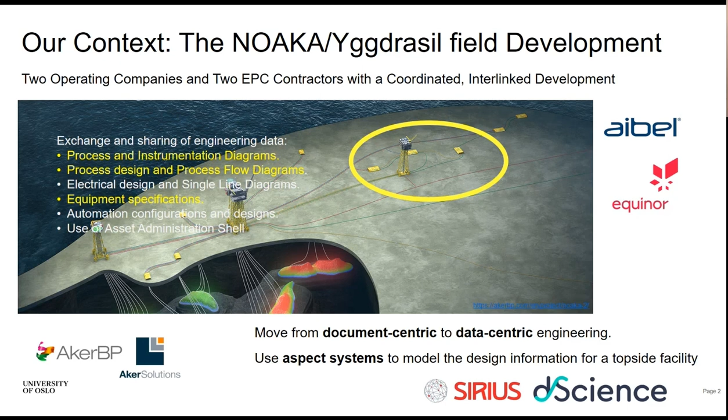And there's a concept called aspect systems, which actually came into the chemical engineering community through Wolfgang Marquardt and the people in Aachen with OntoCAPE, the ontology for process engineering, back in 2010. So, a little bit of what DEXPI is.

DEXPI is at the moment a voluntary and somewhat financed effort to create neutral standards for engineering. And it's quite a large number of people. It's a community who are willing at the moment. They're currently working on becoming a German non-profit organisation to get a bit more commitment.

And so, the DEXPI Plus working group was given a mandate that you can go out and have a look at a DEXPI standard, and that standard defines a way of trying to represent information on piping and instrumentation diagrams. Now, we can do piping and instrumentation diagrams, and we're currently, with the Norwegian industry, stress testing that standard by trying to send piping and instrumentation diagrams around that field development I showed you.

The next question was, what about the other diagrams? The process flow diagrams and the safety diagrams and the block flow diagrams, which are documenting early phase design. What is the linkage of those to P&IDs? And can we create some sort of vendor neutral model for these sort of drawings?

Now, state-of-the-art practice for a process flow diagram is you get a drawing tool and you draw objects. There isn't usually a connection to any smartness behind these objects. And we believe that there should be some sort of object behind that.

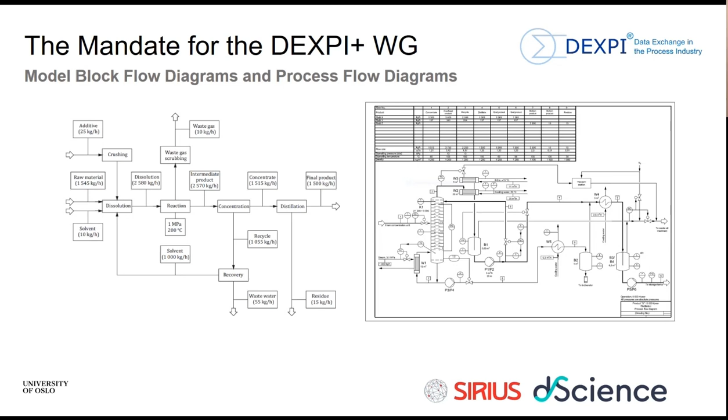So what you see, these are the typical examples of the sort of things you have on process flow diagrams. Now, there is a gap in the standards on how we describe things. Because what does a symbol on a BFD or process flow diagram actually represent? And if you go into the various standards, there's lots and lots of different answers. And most of them are saying, well, that's actually a distillation column. Or, well, no, it isn't. It's actually a system that's performing a process.

So what you've done is you've used a symbol that says distillation column and said that I'm actually trying to model here a distillation process, which I'll eventually go and buy some sort of equipment to realise. And so you want to be able to have process requirements, process constraints, and build up a model of functional systems. In early phase design, you're not so much concerned about what you're building, you're concerned about what you're trying to do in the plant.

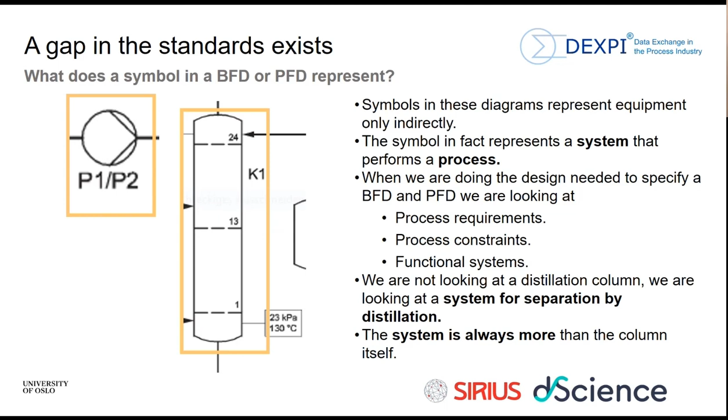And so we're not looking at a distillation column, we're looking at a system for distillation. Or here we're not looking at a pump, which is actually two pumps in parallel. We're looking at a system that you need to pump this fluid. Okay, probably a bit laborious over on that.

And it's rather interesting that standards have been able to test this stuff, because Arthur D. Little, 100 years ago, invented the concept of unit operation, which in some ways completely revolutionised the discipline of chemical engineering. Turned it from being industrial chemistry, where people built bits of equipment, into the discipline we know today of chemical engineering.

And so what we have here is that in DEXPI, piping and instrumentation diagrams, you're dealing with things, plant items, typed by noun: a valve, a pipe, a pump, a heat exchanger. It's a physical object, it's a thing, and you're asking there about how large, how heavy, constructed of what, and which product are you putting into.

Up in process design, we're looking at something which is a process step, and you type that by verb. Compressing, pumping, distilling, separating, regulating flow. So when you see a valve in a PFD, you're thinking, I need something to regulate flow. You're not thinking, I have a valve here. And there you're asking questions about how far, how much, how fast, how efficient, how near to completion, and how pure. Process requirements.

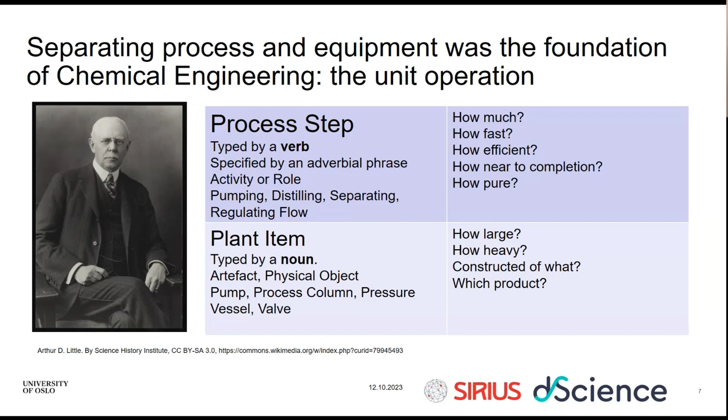And so we have at the moment, and this is taken from systems engineering, this V diagram, where you have functional requirements, how fast, how much, how well the process is going to behave. And then you have equipment requirements, which are about: will this piece of equipment actually tolerate the pressure I have? What material am I made of? Will it corrode? And what you'll see in operation is the equipment functional requirements will result in maintenance things about how well the bit of equipment is behaving.

But then when you want to do process optimization, you'll back up again, trying to get access to process functional requirements. Now, the trouble at the moment is all the standards we have talk about things. And what you see in engineering information systems is all that information you need to do process simulation is rolled down onto a long list of parameters related to a thing. So you've lost all the connection up to the process functional requirements. So DEXPI Plus tries to bring this standards landscape in that direction so that we can actually document process design in a good way.

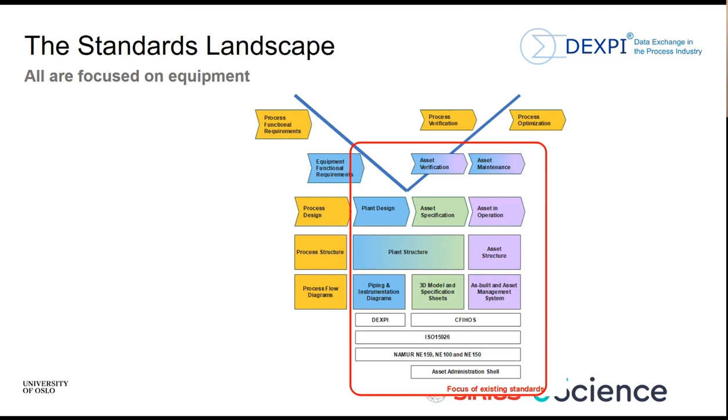If you like three-dimensional diagrams, which I don't, this could be an interesting way to look at it. You're saying, okay, we're looking at some system and we look at it in three ways. First, we think about what it's going to do. That's conceptual design. Then you say, okay, to achieve this functional design, we actually have to build something. And that's the structure, the piping and instrumentation diagram, your specification sheets, and you've got DEXPI and CFIHOS covering that area.

And then the thing tying it all together is the behaviour. And that's where CAPE-OPEN comes in, because it's about simulation and thermodynamic properties. And those things you want to show on a PFD through your stream tables.

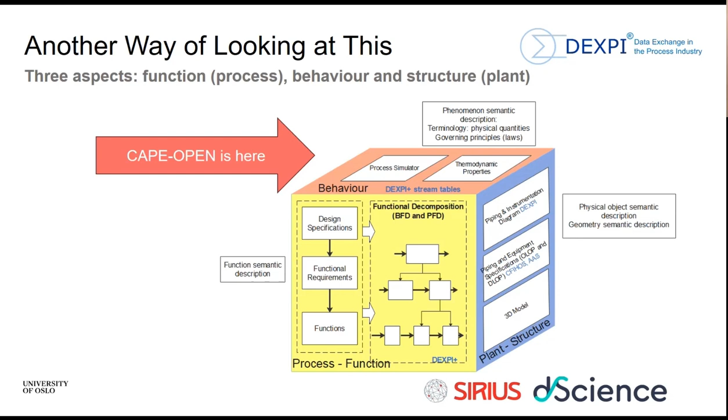So today's design approach is that you get a pile of digital paper sent over from the company, the recommended practices, the standards, the API standards you're going to use. You then structure a manual configuration of a model for a PFD, which you put into your simulation platform. And then you generate out a set of specifications. You then manually, or using macros on Excel, put that into the constraints that you put on your simulation. And then you run lots and lots of cases.

Those cases give you a set of results, which then give you simulation cases, which you put into another Excel spreadsheet and then put onto the stream tables in your PFD and send it to the operator. And that eventually gives you the design, which is an even bigger pile of paper.

What we want to do with our digital engineering is to be able to pass around objects that contain engineering information. We want to be able to get rid of Excel, and we want to create standard ways of talking about cases, results, specifications, and constraints, so that this work process will be made less Excel-based and substantially more efficient.

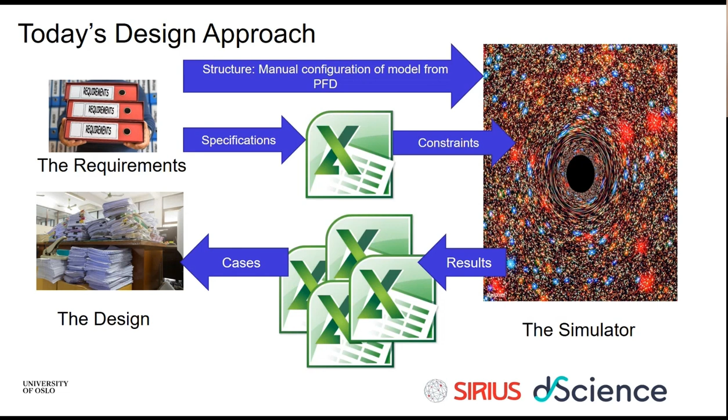So, I've taken a use case from the CAPE-OPEN monitoring interface specification, which is about archival of multiple runs of a flowsheet. Because that's exactly the exercise we want to do in design, where we start building our main process systems, building down through the system until we get to a point where we need to be able to actually specify equipment, we create our P&ID.

And what we want to do here is to be able to take that design, that PFD design, and run many, many cases and get the right cases and create the design window you need to actually then specify your equipment. So to be able to use that simulation in a sensible way and get that information automatically, and not using private Excel-based interface simulators, would be a nice thing.

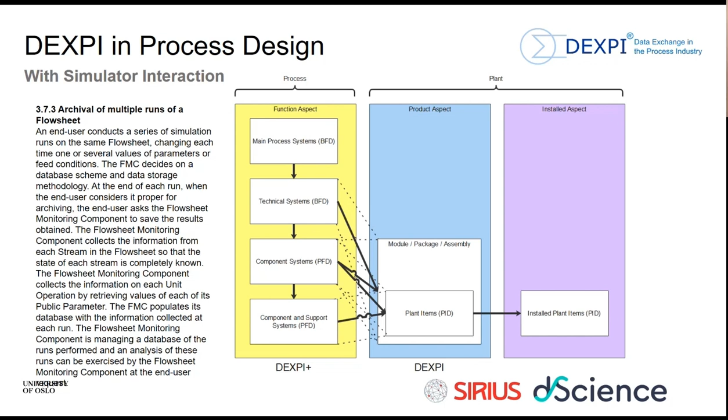So we've designed DEXPI Plus as a library of process steps. Now, the lovely thing about chemical engineering also is there aren't that many process steps in chemical engineering. We'll show you a little bit more. And again, it's not rocket science. We use an approach where you have a block with ports, where you have the ability to put details in. So things like I'm going to do separation in packing or on trays. And then you have sources and sinks. And then you can connect these ports either by energy flows of different types, information flows, or streams.

Looks a lot like the CAPE-OPEN one. It's not accidental, because we basically stole it from CAPE-OPEN. And that stream contains a material state, which is information you have in the stream table. And you have different types of streams because you define a project-specific material template, which says, for my hydrocarbons, I'm going to have this set of components and use these methods. So that gives you the structure for the material state.

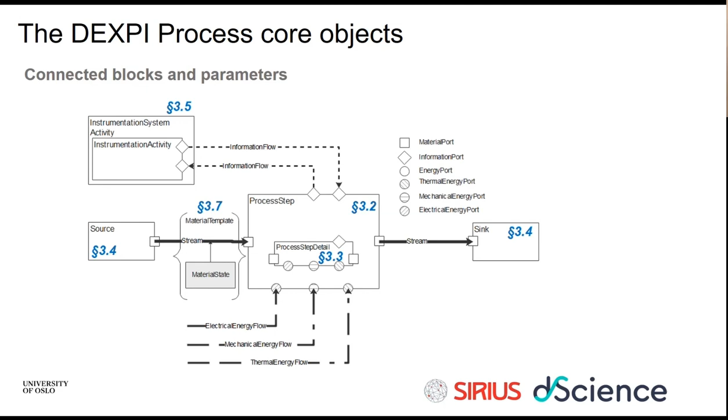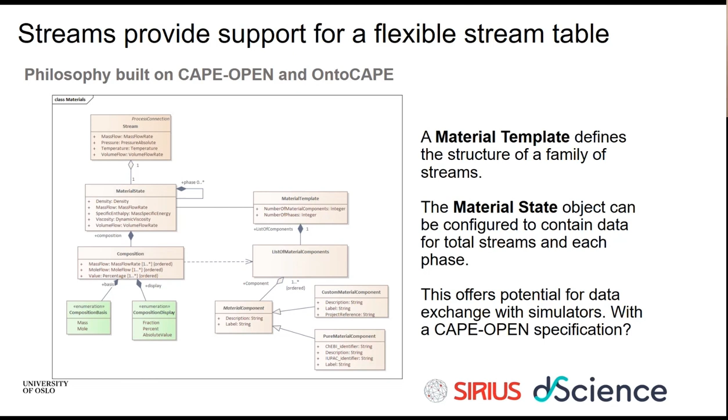So here's the idea of the material template. The material state object is the thing we want to get data out of simulators and put it into to produce stream tables. And I think this offers potential for data exchange with simulators. So what we've developed in the standard is a hierarchy of process steps. Now, obviously, people will come to us and say, yes, but you need another 5 or 10 process steps to make our life as biochemical engineers better.

But what we have is generating flow, mixing, splitting, storing, supplying, exchanging thermal energy, separating of all sorts of different processes. And we also have a hierarchy of process steps. So early in design, you say, I need to separate, I need to heat, I need to do something. And at this stage, I don't care how I'm doing it. As the design proceeds, you're then getting down to the level of unit operations and component systems, where you're also saying, yeah, and I'm going to compress using centrifugal motion. And then that has process implications for the rest of the flowsheet. So you actually have to track that decision on how at this stage of the process design.

So then we have a library of separation by distillation, transporting and piping, compressing by centrifugal motion, as an example. So what we have here is the ability to build up a structured model of a process you have. And also you can associate variables with those specific processes. And what we're doing here is creating a structure that you can refer to by making specifications.

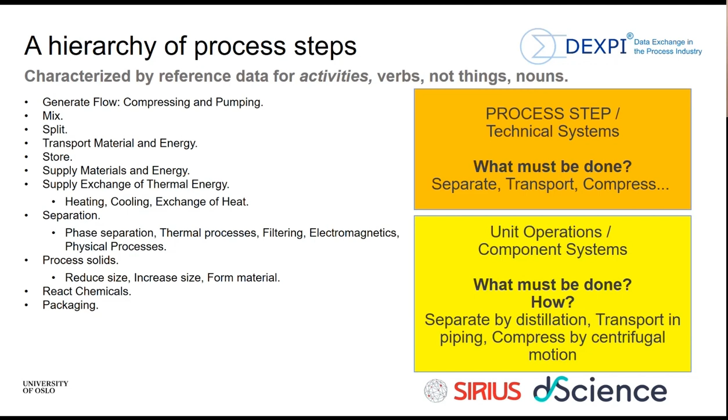And what we often see in standards is that the standard will say a valve is going to have a parameter called maximum allowable working pressure or minimum ambient temperature. Now that's useful, but what you're doing by specifying that in the standard is you're making that model very fragile, because every one of those types of qualified specifications you make is going to actually break the model when you want to make a new type of that specification.

So what we've done in DEXPI Plus is said there's an ambient temperature for a block, there's a temperature for a block, there's a pressure for a block. And then you as a user can create many, many different statements about that pressure, qualified by what mode or range or provenance you have on that variable. And that way we can map across to CFIHOS, because CFIHOS really likes those sorts of lower limit, upper limit, average type parameters. But this makes us more flexible and enables you to create a structure file which doesn't contain any data at all, and then in parallel to that, lots and lots of case files which actually contain the numbers.

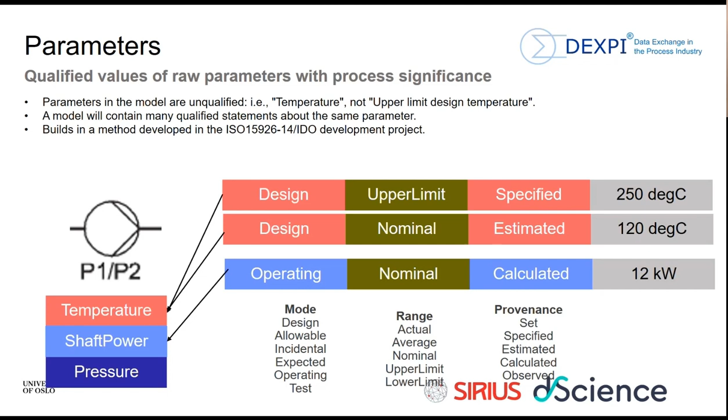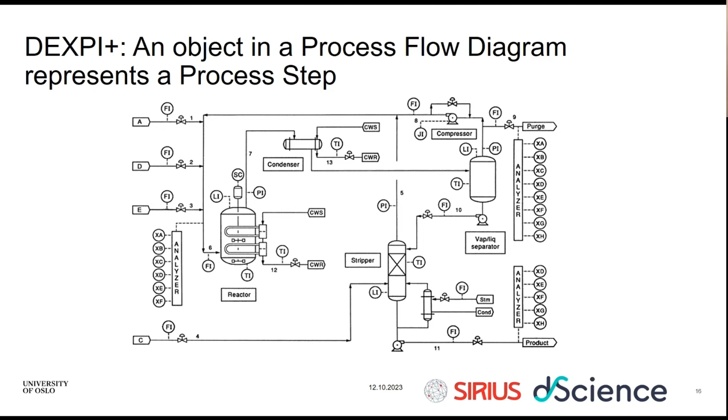So a little bit of example to motivate. Here's a well-known demonstration process called the Tennessee Eastman process. And we were able to model that process flow diagram. It's a fairly effective process flow diagram because the Tennessee Eastman people deliberately didn't actually put in any controllers, because the whole idea was to design control structure.

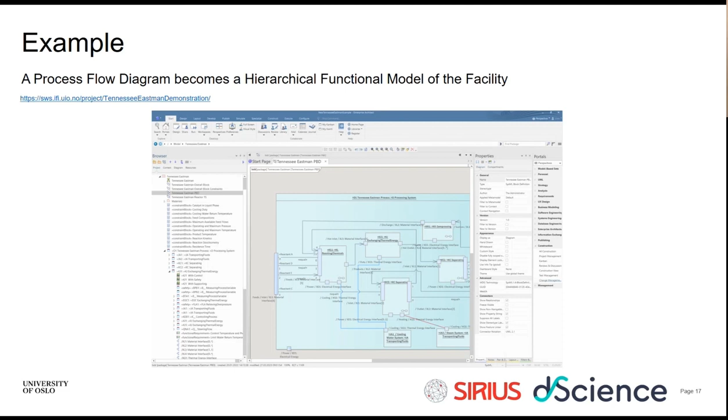And so we then turned that into a model where we draw up a library. In this case, we use UML as a prototyping tool for the exercise. We need to develop some better tool support for this, but this demonstrates the data model. And what you see is that you build up blocks with ports, connections between those blocks. The important point is a connection with no length. A connection says, I go from one system into the other system, and I'm responsible for handing over something there. And the topology naturally resembles what comes there.

We've also tried it out using a tool called AutomationML, which is an automation industry standard for structuring data and exchanging data, and it works very, very elegantly.

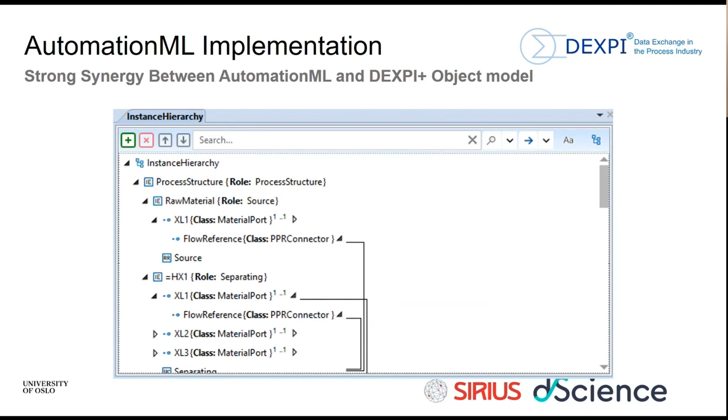So, okay, quickly, using DEXPI process files to store design cases. Well, as I said before, we create a data set containing a structure, how things are tied together, and then you, as an engineer, can prepare data sets that contain specifications that point into that structure, saying things that are going to be necessary. So you have parameter values, and you can specify values of the material states in ports. The simulator can then write data sets that contain the behavior of the process, again referring into the naming structure you've got in the DEXPI Plus structure.

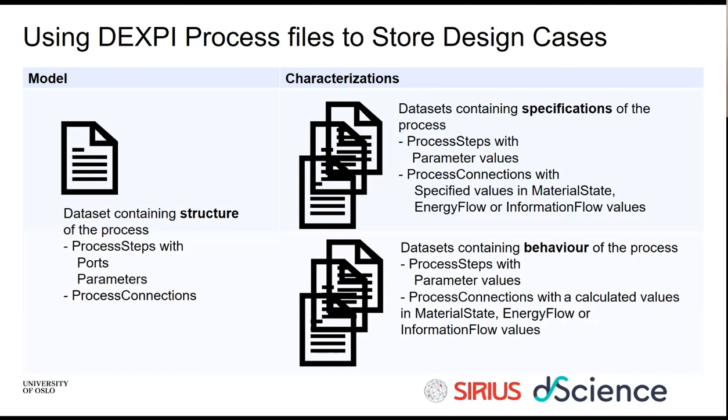Now, to do that, we've got some challenges about interaction with the simulator. Structure: there's no way of implementing, configuring, auto-configuring the simulator based on a structure written in any standard. So you've got to manually map across to there. Same at the moment with specifications. CAPE-OPEN doesn't write numbers back to simulators. However, the flowsheet monitoring interface is capable of sending us results back at this stage.

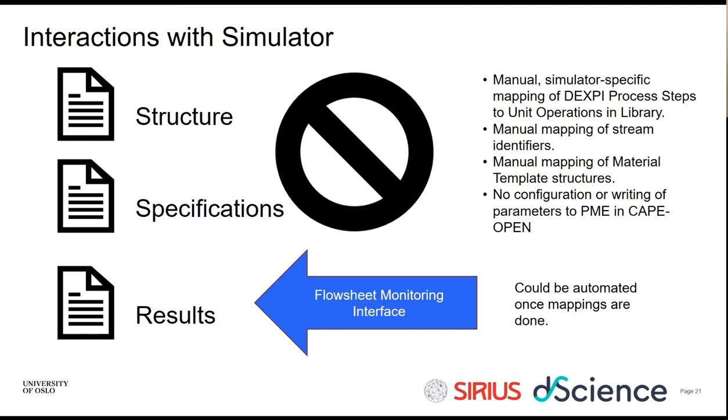And by doing a little bit of reading around the monitoring interface, I found this diagram showing a set of objects which map pretty nicely to the DEXPI Plus objects. I had a discussion with Michelle on my misunderstanding of what the role of material template was. So I think actually it's not quite fair to say that it's not in thermodynamics 1.1. But we have the ability to define these things.

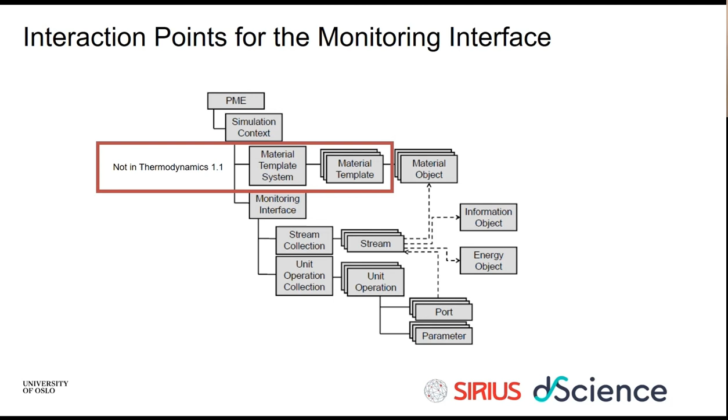And we map it this way and say that, okay, the process step corresponds to a unit operation in CAPE-OPEN. Ports correspond to ports. And your streams, energy flows, and information flows map one-to-one to these objects in CAPE-OPEN.

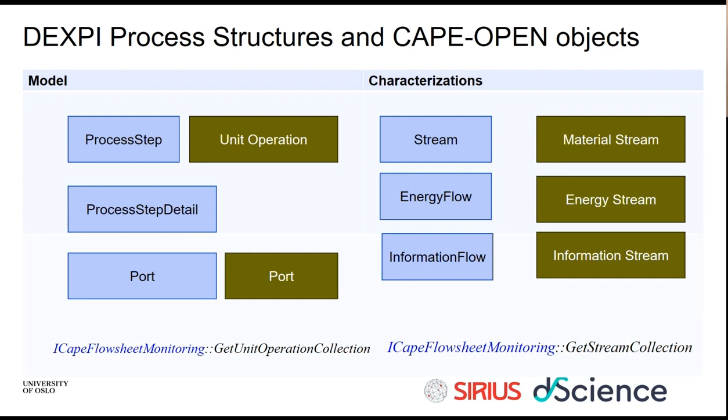Now, what sort of procedure do we then need to do to extract information from simulators? Well, okay, you've got a project, you've got your favourite simulator, and you're basically not going to choose that. That's been supplied by either your customer or your company procedures. So the first thing you need to do is to map the process step types in DEXPI to unit operations in the process simulator, and map the port structures to the library unit operation ports in the process simulator.

So this is going to be a cross-reference table of type to type and port to port, hopefully at the library level, not the individual level, so you can reuse that information. And then you can map the block parameters with the exposed parameters from each unit operation. And that's the preliminary work, trying to do it at the simulator level.

And then at the project level, you can then map the DEXPI material template with your CAPE-OPEN material template or the thermodynamic spec in the simulator. And you can map process step identifiers with unit operation identifiers. Again, if necessary, you then have to map special parameter identifiers and stream, energy and information flow identifiers. And then the material objects with material state objects.

Now, with that mapping set up, you're then in a situation where you'll be able to ask the monitoring interface to supply back the information you need for the technical files. So this is a thought experiment at this point. We're doing a little bit of work with DWSIM to try to show how this can work in practice. And what I wanted to do here is just present this as a thought experiment and as a challenge.